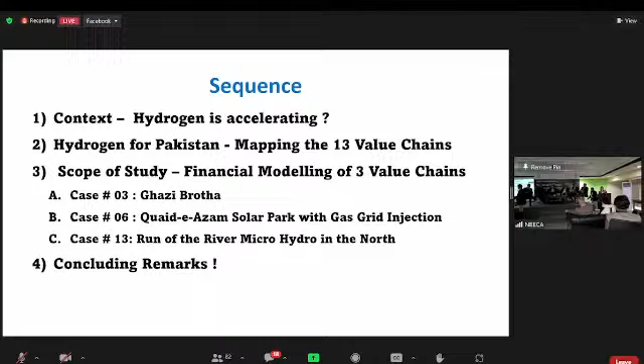And then at the end, I will present some concluding remarks, particularly some insights from this analysis which we carried out. So going forward, as most of you know, hydrogen will have a significant role to play as a clean energy vector in the future energy mix.

Some examples of applications that become competitive: the first one, commercial vehicles, trains, and long-range transport applications are going to compete with low carbon alternatives by 2030 due to lower equipment and refueling cost. If you look at the Energy Ministerial in Japan, they have agreed to have 10 million vehicles running on hydrogen by 2030. This is a very ambitious target, but the data now available shows they are quite in line with this progress.

Then hydrogen boilers will be a competitive low carbon building heating alternative, especially for existing buildings currently served by natural gas networks. The third application is industrial heating - hydrogen will be the only viable option to decarbonize in some cases, besides balancing the power system, as hydrogen production cost drops and demand is going to increase in the days to come.

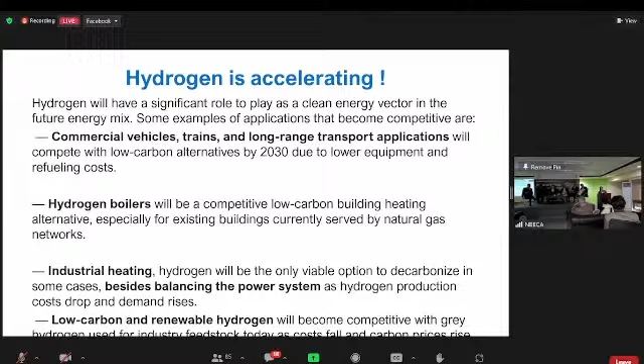These trends are highlighted in this slide, where you could see the drivers highlighted on the left hand side, showing a stronger push to limit carbon emissions - 10 years remaining in the global carbon budget to achieve the 1.5-degree goal. Right now, 66 countries have announced net zero emissions as a target by 2050 and are focusing on this. Out of this, 18 countries have a clear roadmap to follow green hydrogen as a major vector in their energy mix.

Then there's a very visible trend showing that costs are falling for renewables and hydrogen technologies. There's roughly an 80% decrease in global average renewable energy prices since 2010, and this is a big push. Also, there's roughly 55 times growth in electrolyzer capacity by 2025 versus 2015, making hydrogen a very viable technology in the days to come.

There are a few indicators also showing a growing momentum when it comes to the strategic push in national roadmaps. Roughly 70% share of the global GDP is linked to hydrogen country roadmaps data, from these 18 countries, which contribute to 70% of the global GDP, and they are very hawkish on hydrogen as an important vector of energy in their energy mix.

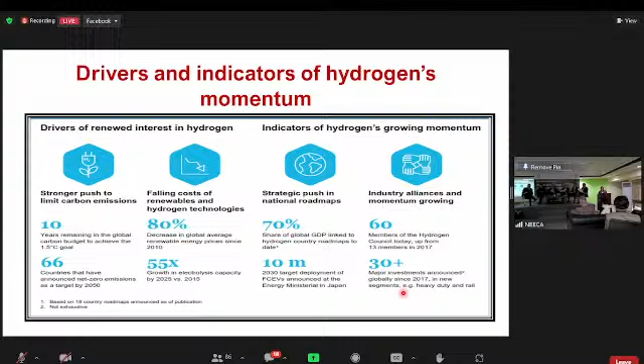So having this kind of trend and key indicators in mind, there's a possibility that scaling up the full value chain is key to unlocking potential applications. There's a 60% cost reduction of hydrogen by 2030 for end users. This is a very important finding of research recently carried out, which highlights a subsequent study. I'm going to show some of our results which are not very encouraging, but keeping this trend in view, those results become very encouraging.

So then hydrogen could meet a significant share of global energy needs competitively. Roughly the share of global energy demand where hydrogen applications can compete with other low carbon alternatives by 2030 is roughly 15% plus. That's a huge share in the energy mix if we look at the current scenario.

So then why hydrogen for Pakistan? Keeping in view that we analyzed the 11th, 12th five-year plan, Vision 2025, and most of our annual reports on energy, state of energy in Pakistan, these highlight the strategic energy priorities of the government of Pakistan: number one, national energy independence, then continuous energy supply security, and affordable energy. These first three include...

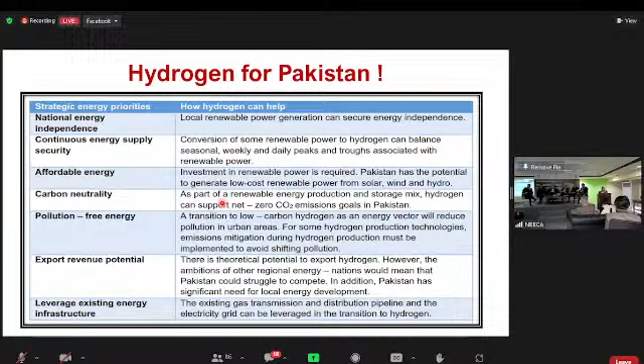And then the last one, leveraging existing energy infrastructure, which is very much there, which I'm going to show in the next slide, showing that blending hydrogen into the high pressure gas grid transmission must be evaluated very carefully, as there is a possibility to add a mix roughly from 2% to 8% in a very safe range, but it could even add up to 12% as per international research.

Dr. Stephen is along with us, who is an expert in this area and a kind of mentor for me as well when it comes to the technical side of this important vector of energy. He will also highlight this.

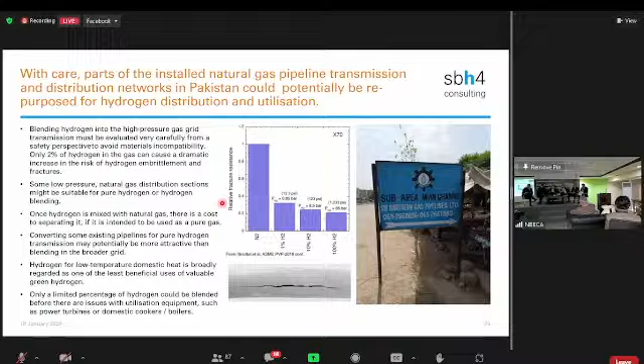So then there's a possibility of some low pressure natural gas distribution sections which could be augmented by adding hydrogen, by blending into the existing infrastructure of the gas pipelines in Pakistan. Once hydrogen is mixed with natural gas, there is no additional cost, or if there is a cost, then it's very minimal. But when it comes to separating it from the natural gas, then it takes a lot of effort and cost. Converting some existing pipelines for pure hydrogen transmission may potentially be more attractive than blending in the broader grid. Then hydrogen for low temperature domestic heat is broadly regarded as one of the least beneficial uses of valuable green hydrogen.

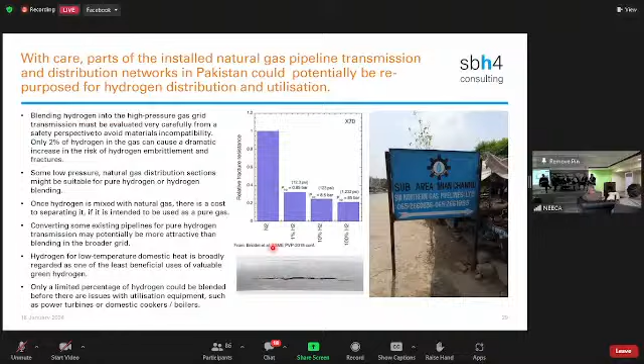As compared to burning it for fuel or cooking, it is a more important vector to be used for power turbines and boilers, as well as for transportation infrastructure and networks. So keeping in view these benefits and gains, there are a lot of potential gains to opt it as an important vector or driver in the energy mix.

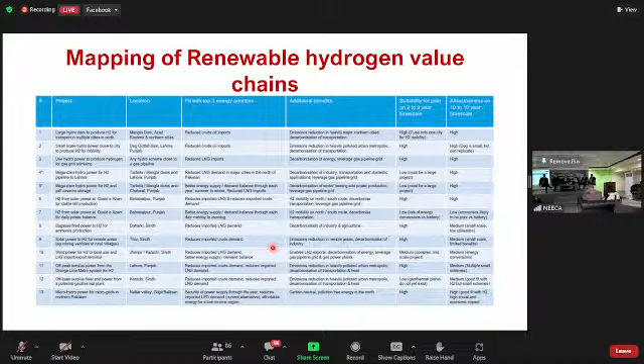Going forward, we mapped 13 value chains, but due to paucity of time, I'm not going to develop on that, since this presentation will be available to all participants after the event. These 13 value chains were clearly mapped where some business proposition was existing, and these 13 propositions were presented to NEECA, which proposed, keeping in view multiple aspects, along with the team of experts working on this study.

We then finalized three projects. The number one is project number 3 out of these 13, which is use of power to produce hydrogen for gas admixing between 2 to 6% at Ghazi Brotha run of the river hydro dam.

Then project number 6, which is a kind of Quaid-e-Azam solar park, over where hydrogen will be produced. There are different variants, which I'm going to show you in the next slides. And then this will be transmitted to some nearby station, where it could be admixed to the existing pipeline network.

And number 13 was a proposition where a micro hydropower for micro-grids is going to be established in the northern Naltar Valley of Gilgit-Baltistan. This micro run of the river grid is going to produce electricity.

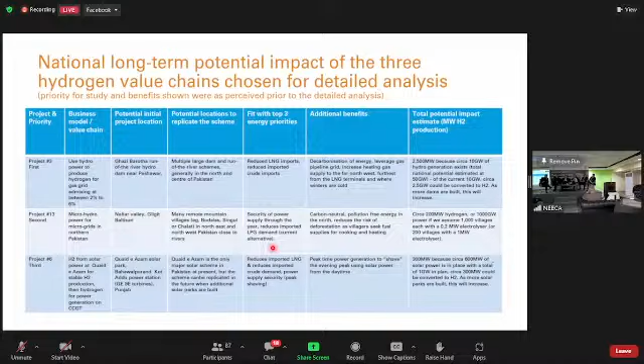Besides, for 9 months, it is going to produce hydrogen as well as a byproduct, which is then going to be used to run that grid or the turbine for more than 1,000 villages nearby the Naltar Valley, to provide electricity during the cold winter where the run of the river water is not available in the valley.

So these three propositions were then further evaluated by having the financial modeling. This is the methodology and key assumptions which we used for our financial model.

The first one, we use the discount rate of 7% per year, as it is the same benchmark being used in the Planning Commission for evaluating any long-range projects in Pakistan. Then, tax and duty on imported capital machinery at 25% was used, based on the HS code related to electrolyzers and all the equipment needed for these value chains to be established in Pakistan. We used a similar taxation or tariff structure in our modeling.

Then hydrogen energy value substitutes an equivalent amount of energy from LNG, LPG, or timber wood—because in northern areas it is not normal wood, it's a kind of good quality timber wood which is being used. So we use the pricing of that wood as a proxy to benchmark the benefits of having this much energy available in the northern part of Pakistan.

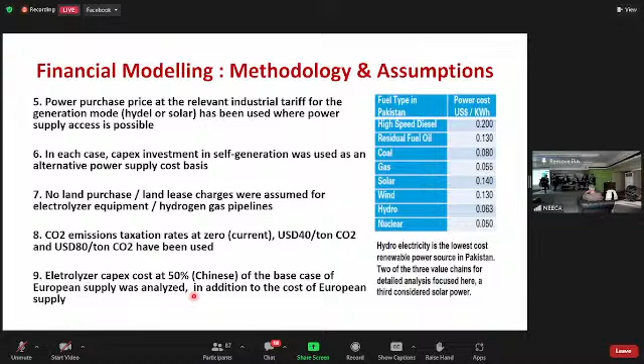So then electrolyzer capex cost at 50%, because some Chinese electrolyzers as compared to the European or Western electrolyzer manufacturers are available. So we ran few models by reducing the cost to 50%, so that if the Chinese electrolyzers are being used, what is going to be the implications on our net present value and economic rate of return.

Besides this, we carried out sensitivity mapping for each scenario using a 10% increase in cost, then another scenario for 20% increase in cost, and then a third scenario where we increase the cost by 10% and decrease the benefits by 10%, just to adjust for how this kind of possibility is going to impact the financial viability of these projects.

Our calculations also included additional factors that are region and application specific, such as the cost of storage, compression, transmission, and topography of the region where these value chains are going to be established.

These are needed if hydrogen is not self-consumed in few cases, though we have not accounted for taxes on the entity operating the plant, which could be province-specific taxes or also depend on the business model. For example, hydrogen could be produced for self-use or it could be used for sale in the market. So this is the kind of caveat to our analysis.

But these simplifications mean that the cost estimates are more generalized, because we think these are not too loose and can be very easily adapted for the necessary considerations if some more specific and advanced level analysis is required in this context.

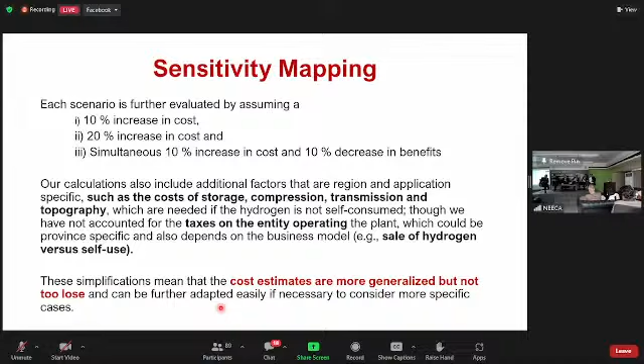So, after giving you this overview of how robust and rigorous this analysis was which we carried out, now I'm moving to the key findings of the analysis.

These are the life cycle pie charts, which show that the major cost is the electrolyzer when it comes to the 100 megawatt electrolyzer being installed on the existing Ghazi Barotha turbines. But the annual power cost is 29%, which is a huge cost.

So then in the subsequent model, we analyzed another possibility of 1 gigawatt, where we produce this electricity ourselves by adding an additional turbine on the existing Ghazi Barotha dam, and then analyzed what is going to be its implications. Moreover, we also analyzed a 1 gigawatt turbine as well as 1 gigawatt electrolyzer to be installed, and then looked at the possibilities.

So these you could see over here. Then all the four scenarios regarding the proxies which we use, the local natural gas, then LNG at the Qatar price, all those 5, 6 scenarios which I presented in the previous slide were analyzed.

Subsequently, the similar situation was analyzed on a 1 gigawatt power plant and electrolyzer. But unfortunately, you could see that there is a serious reduction in the levelized cost of hydrogen, that goes from $3.16 to $2.92. But when it comes to the levelized cost of energy, which is being used here, it's 4 cents, because we are having our own capex to produce electricity to run this electrolyzer on the Ghazi Barotha Dam. But unfortunately, there is no scenario which is feasible.

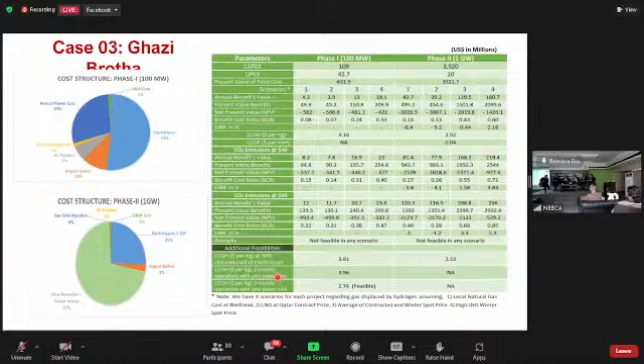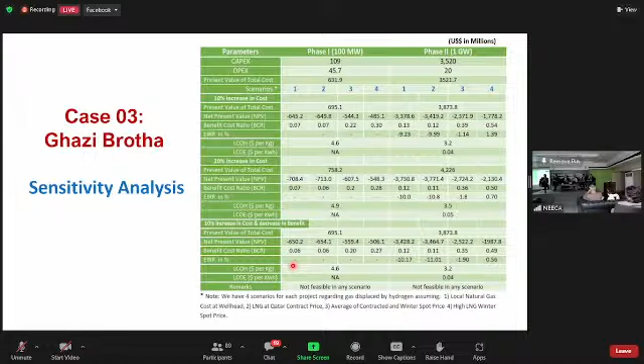So that was one possibility. We then ran the sensitivity analysis along similar lines, as I mentioned in the previous slides on methodology. Unfortunately, again, there is no possibility of feasibility under any scenario we ran on this model. So let's move to the next case.

That is the Quaid-e-Azam Solar Park with gas grid injection. Here we had three major possibilities. The first was a 100 megawatt option at the existing solar park, where we have to purchase electricity from the solar park, and its annual power cost comes to 25% of the life cycle cost of the total project.

The life cycle of the project is 30 years across all value chains, per the criteria used by the Planning Commission of Pakistan. We then ran another possibility where power would be uplifted by adding a CQ Solar system of an additional 100 megawatt and placing a 100 megawatt electrolyzer on it. A third possibility was a 1 gigawatt uplift of the solar park, along with placing a 1 gigawatt electrolyzer.

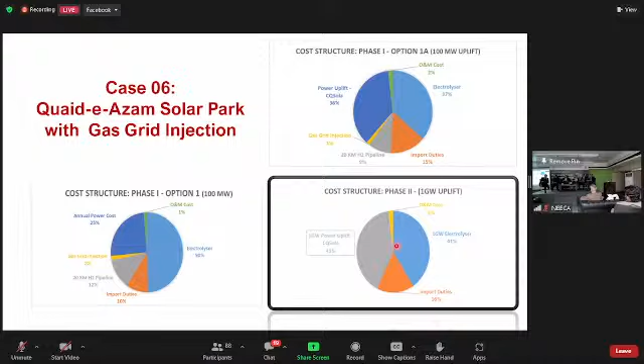In that scenario, in the second case, the capex increases but the annual energy cost goes down. When we want to achieve economies of scale with a 1 gigawatt uplift, the capex further increases, and there's a massive decrease in the unit cost of electricity. The levelized cost of energy goes down, but the levelized cost of hydrogen is still not good enough to make the project feasible.

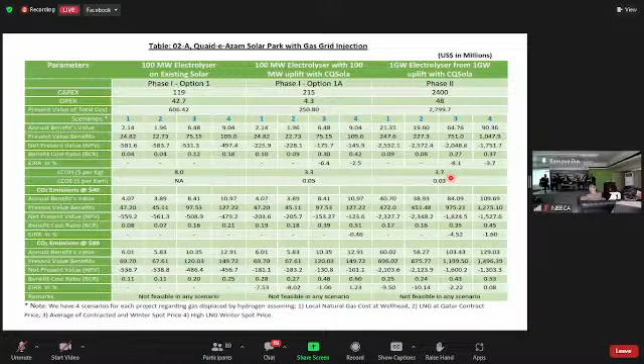These are the key findings. In option one, the levelized cost of hydrogen is $8 per kilogram. It goes down to $3.3 per kilogram when we have capex to generate our own electricity by uplifting the energy system, and it goes to $3.7 per kilogram when we increase the size from 100 megawatt to 1 gigawatt. But the levelized cost of energy goes down from $0.05 to $0.03 per kilowatt hour.

So there seems to be economies of scale when you expand the size of the solar park, but there are no economies of scale when we move from a 100 megawatt electrolyzer to a 1 gigawatt electrolyzer. There is a certain reason for this, which I will explain in the conclusion slides.

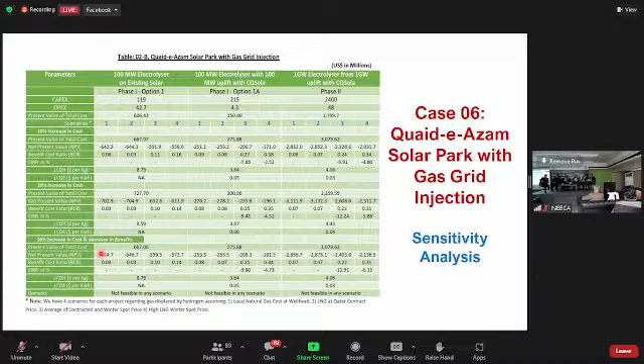Subsequently, even at $40 and $80 carbon emission tax, it's not going to make this value chain feasible from any angle. We then carried out sensitivity analysis along similar lines, but unfortunately again there was no impact on the feasibility of any of these value chains analyzed in this mega project.

Now let's move to the 13th case: run of the river micro hydro in the north. As I mentioned, the objective was to produce electricity on the run of the river, besides producing hydrogen as a byproduct, to be used for the three months in winter when water is not available and there won't be any electricity availability. It could be a microgrid solution for 1,000 small villages, with 200 to 300 housing units per village.

So here you could see that we ran three scenarios where the local natural gas and imported LPG prices were compared.

Since no pipeline gas could be provided over there, we haven't used that as a proxy to benchmark the benefits. Eventually, we used an average of LPG and local gas prices as another scenario. But in all these three scenarios, there is no possibility that it could be feasible.

So then we thought that deforestation is a major problem in that area, which could be curtailed if we provide the same hydrogen as a cooking fuel in small cylinders or through a small pipeline network in that area. These housing units could use hydrogen as a cooking fuel, saving the good quality timber that is being used over there.

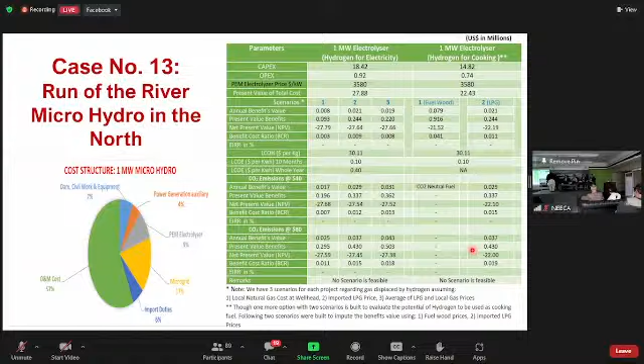But yet, this scenario is not very feasible. Eventually, if the wider economic benefits, like stopping the deforestation in that area, are incorporated, then this becomes slightly closer to feasible. Its cost benefit ratio becomes 1 to 0.98 - very close in range.

So then we ran the sensitivity analysis on this value chain as well, but unfortunately no scenario could become feasible along the sensitivity analysis.

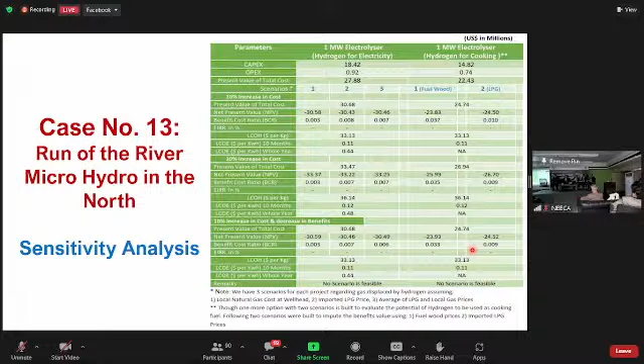Using this to produce the power - it could be hydropower or solar power - is always more attractive because the levelized cost of energy is very cheap in that option. But when using investment in self-generation, the levelized cost of energy and levelized cost of hydrogen are in the range of international benchmarks for similar schemes, though they are not feasible in the Pakistani context.

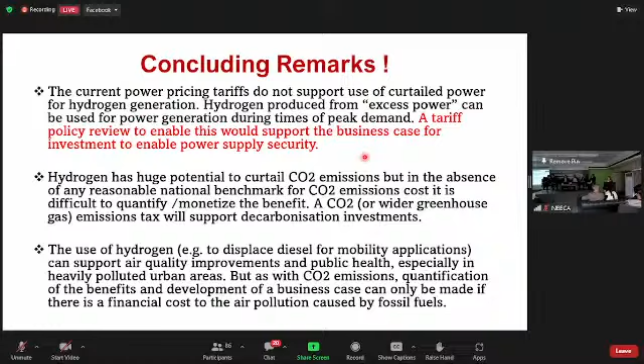Development of a regulatory framework for underground hydrogen storage in new salt caverns would make the case of the highest LNG cost analyzed very realistic. And lastly, alternative hydrogen production technologies and utilization cases may also become bankable projects.

Only 3 out of 13 proposed value chains were analyzed in detail through this study, because that was the scope of work we took as consultants. This study has therefore not been exhaustive in conducting a detailed analysis of the breadth of options for hydrogen deployment in Pakistan. So a future strategy that treats the value chains we mapped as infeasible would not be a wise approach. Rather, there could be a lot more potential, keeping in view the time lag since some of the key developments happened.

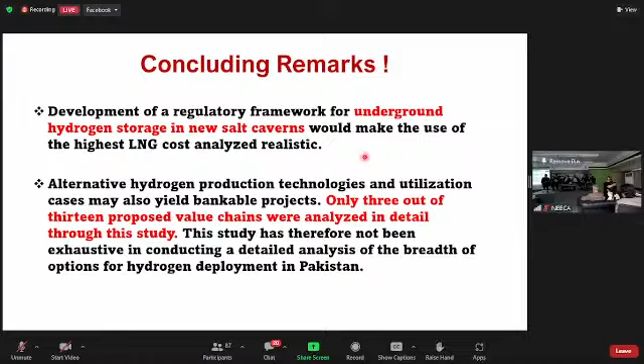Mr. Stephen, who is the guru of hydrogen, and from whom I also learned a lot while being team lead on this assignment along with Nika, will highlight this further in the subsequent presentation. With these key highlights and insights, I would like to thank you for your attentive listening. And over to NEECA, please.

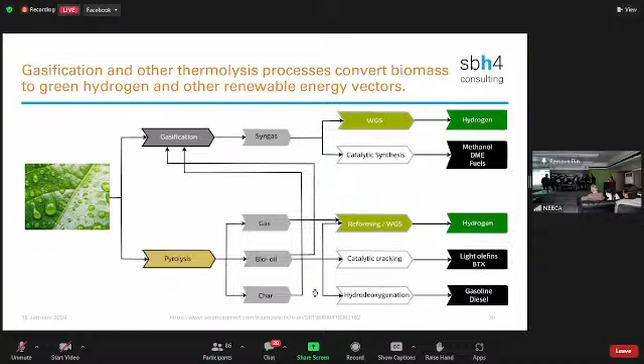Thank you very much. Can you hear me, please? And can you also confirm that you can see my screen? Yes, Stephen, we can hear you, please. And can somebody confirm that you can also see the screen that I'm sharing? Has that worked? Yes, we can see the screen. Thank you very much indeed. I'm just trying to adjust things so that I can actually see myself as I present here. Otherwise, it's a bit difficult for me.

Firstly, thank you very much indeed to Dr. Nadeem for his presentation today and also his friendship over the last 4 years. And thank you also to the esteemed colleagues at NEECA for the invitation to speak today. A lot of things have changed in the world of hydrogen since we did the study.

As Dr. Nadeem said, the 3 cases we looked into in detail were simply 3 of 13. If I were to have my time again, with the experience that I now have and the world has 3 years later, I think perhaps we might have picked different studies that could have ended up being significantly more economically attractive.

Things have changed significantly, and it really is worth having another look, I think, is my main and key message to you, which I think is the message Dr. Nadeem was trying to explain in his last slide.

So let's see what's been changing in the world today. Here are what I regard as 10 key shifts that have taken place, some of which we accounted for in our modeling. For example, the expected cost reduction of Chinese electrolyzers, we modeled for that. But other things have also changed.

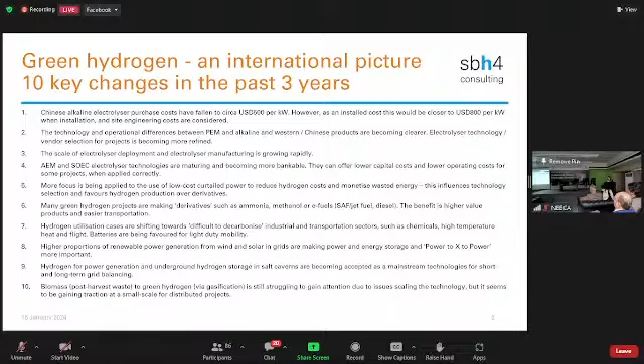So when Dr. Nadeem was speaking a moment ago about providing heat for cooking and heating in very remote regions, we were looking at doing that through hydrogen and making hydrogen locally. If I were to have my time again, I think what I'd be saying is let's make renewable LPG, effectively let's make DME, dimethyl ether, and transport that into those regions and provide them with enough inventory to cover the winter. So I think what the world now knows and what I now know would really cast different light on the work that we did, and or would do if we were to come back into this area.

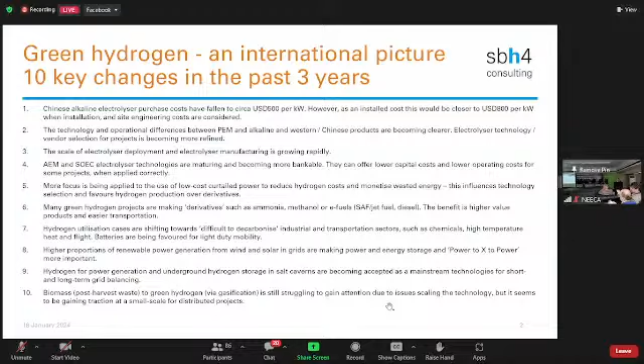Let's cast our minds back 100 years to the first big hydrogen project that ever took place, and this was in Norway, at more than 100 megawatts. So this is comparable to some of those big hydro projects that Dr. Nadeem was explaining to you. The reason for making hydrogen was not to make hydrogen. The reason for making hydrogen was to make ammonium nitrate fertilizer.

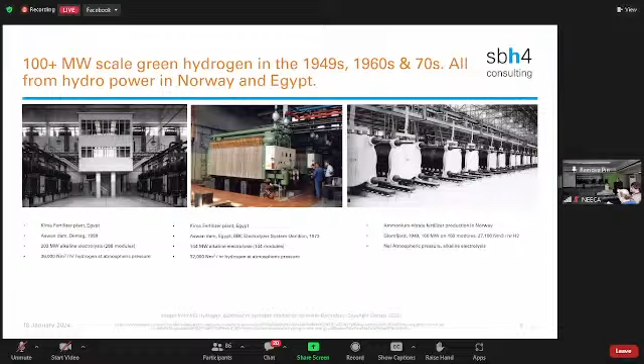On the left here, Kwekwe in Zimbabwe, that was also ammonium nitrate for use in the mining sector and also as a fertilizer. Here, two cases in Quebec in Canada, all of these running off hydropower.

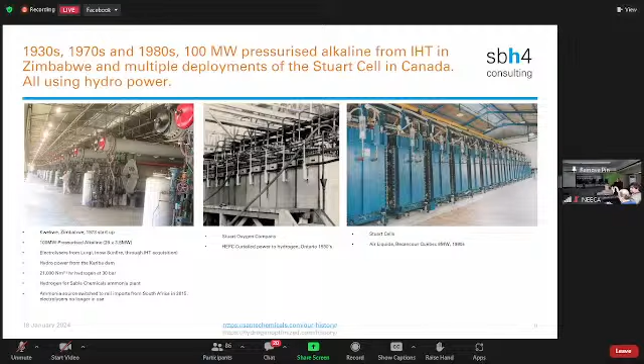All of those projects, which were about as big as anything we're doing today, have now closed down. Why? Because making ammonia or ammonium nitrate or urea fertilizers from LNG, from liquefied natural gas or pipeline natural gas, was cheaper.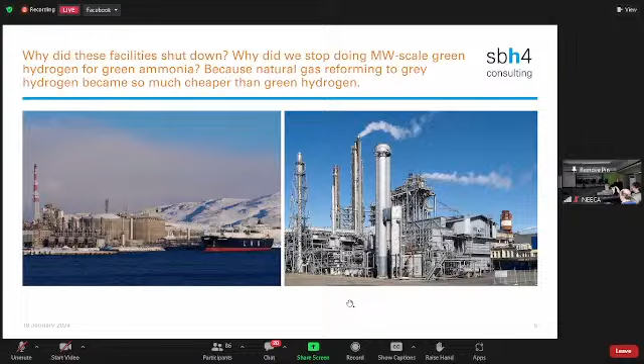On the other hand, we're now seeing, in some cases, rising LNG, imported LNG prices, and a drive to decarbonize and defossilize. So there's a huge motivation to look again at those big hydrogen projects, just like we were running 50 years ago. And as you can see, the electrolyzer on the left there was exactly the type that was installed in Kwekwe. And even the electrolyzer technology has been rejuvenated by a German company called Sunfire. So we're seeing the whole clock turn back between 50 and 100 years, and we're reinventing what we have learned and done in the past.

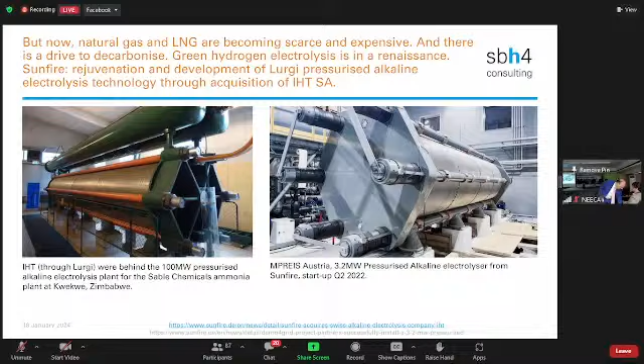That's exactly what is being done in this project in China. Ammonia, again, is the target molecule, but of course we need to start with green electrons, then make green hydrogen, then make the green ammonia.

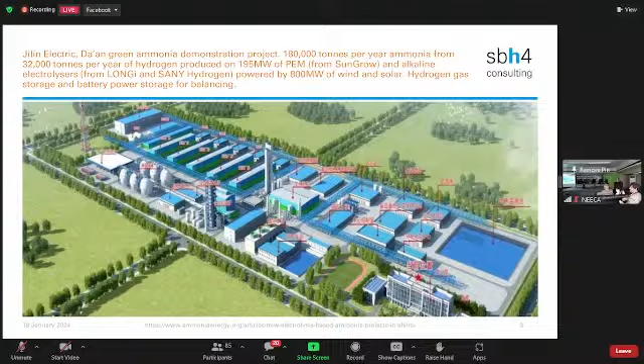And it's interesting that this particular project uses a combination of electrolysis technologies, from alkaline that we evaluated heavily a few years ago, and includes an element of PEM, which is a different electrolyzer technology that typically costs a bit more to deploy, but has the benefit of being able to work with intermittent power. So it switches on and off more easily.

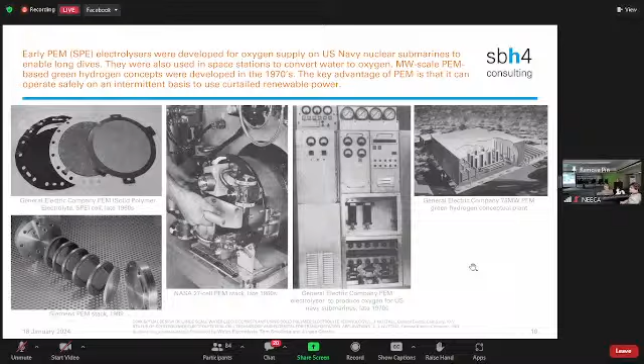So the beginnings of PEM electrolysis, you can see here, were through the General Electric Company in the United States and Siemens in Germany, around about 50 years ago. And this is a modern PEM facility on the left, 10 megawatts in Germany, on the right, 20 megawatts in Canada, from ITM Power and Cummins.

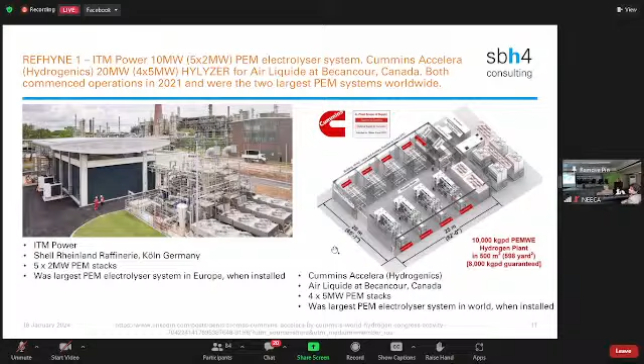And here's a large Siemens PEM electrolyzer on the left, just been delivered and waiting to be installed at an e-methanol facility in Denmark being operated by European Energy.

Again, I keep coming back to this point that a lot of hydrogen is being converted to other chemicals, typically called hydrogen derivatives, such as methanol and ammonia, because they are higher value and easier to transport than hydrogen.

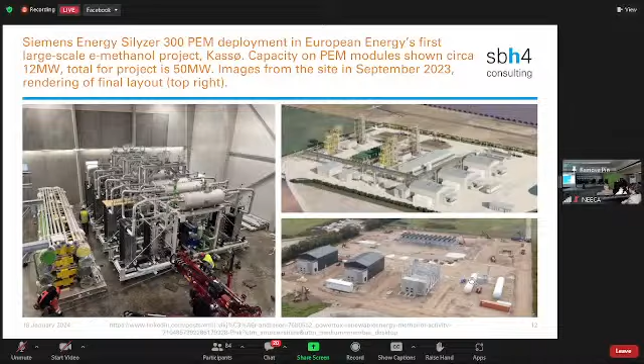Taking a step back, if we want to make hydrogen or even those hydrogen derivatives, we must recognize that the vast majority, if we look at raw capex of a fresh greenfield site project, is going to go into making those green electrons. You saw that very clearly from one of the pie charts that Dr. Najim put up when we considered self-investment in a new turbine at the Ghazi Barotha Dam. Suddenly that was three-quarters of the project capex and the electrolyzers were looking cheap.

Whether it's wind, solar, or hydro, the same holds true. What it really means is that we need to focus on green hydrogen projects in parts of the world, or in parts of Pakistan, where green electrons are cheap, where we've got good solar, where we've got good wind, or on the other hand, where we have curtailed power. Dr. Nadeem made a few examples of the use of curtailed power when there's more power being produced than we can actually put onto the grid or recover. Free power.

All renewables are variable. Everybody knows about the variability of solar. What people don't quite know so much about is the variability of hydro - it's variable on a seasonal basis. And of course, wind just does whatever it wants to whenever it wants on a daily, weekly, and annual basis. But we can integrate and combine those various different variable renewable sources to give a relatively firm power profile.

This can improve electrolyzer utilization and economics, and Dr. Najim was trying to explain this through some of his work. The electrolyzer utilization can improve the electrolyzer economics, and a lot of historical projects have tried to increase electrolyzer utilization. Certainly if we're going through to derivatives such as ammonia and methanol, that can be helpful because the total project capex is higher.

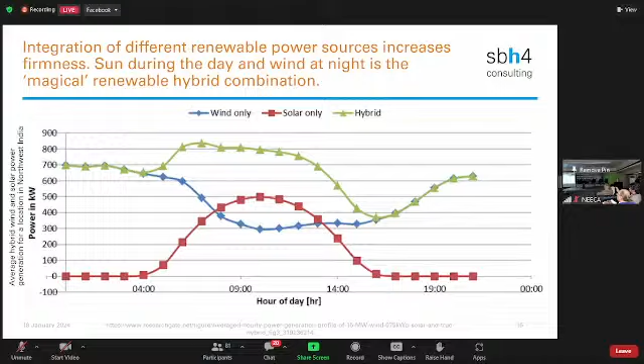Now what that means is that instead of you paying money to run your electrolyzer and purchase green electrons and make hydrogen, somebody else is paying you money to take those electrons off the grid. Somebody is paying you money to make hydrogen. It completely transforms the economics. Again, when we start thinking about these business models, we need to understand what is the power pricing strategy and tariff in a particular country. But whether or not the pricing tariff works in this way, the grid will be working in this way.

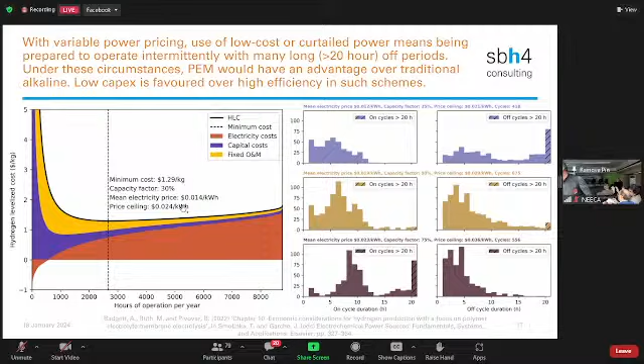This whole business of using curtailed power is a massive shift in the way people are thinking about green hydrogen projects. What that means, though, is that we must be using an electrolyzer technology that is able to cope with intermittent operation, on-off operation. That favors PEM or a new technology called AEM, which tends to be more expensive than alkaline. However, if we think smart, we can combine the cheaper alkaline electrolysis with the more expensive but more flexible PEM or AEM electrolysis to generate an electrolyzer park that is well suited to variable or even intermittent renewable power operation.

When we modeled, we used McPhy as a Western electrolyzer provider, and a lot of the Chinese producers are also catching up with Western technology. Everybody's showing us a vision of large electrolyzer parks and how they would look in the future based on modular configurations.

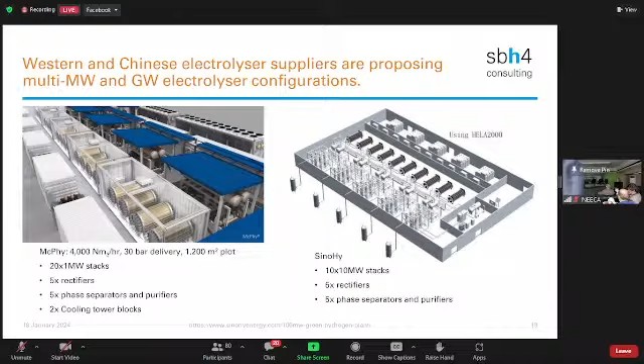Pressurized alkaline is becoming a very standard technology, especially for the younger, newer Chinese electrolyzer producers who are offering the lowest cost alkaline equipment. We can see here that the price for LONGi equipment is perhaps as low as $350 per kilowatt, but bear in mind that's the purchase price of the equipment. Once it's been installed on site, you can perhaps say it's going to be 500, 600, maybe even $700 per kilowatt once you include the engineering costs, tie-ins, and site costs.

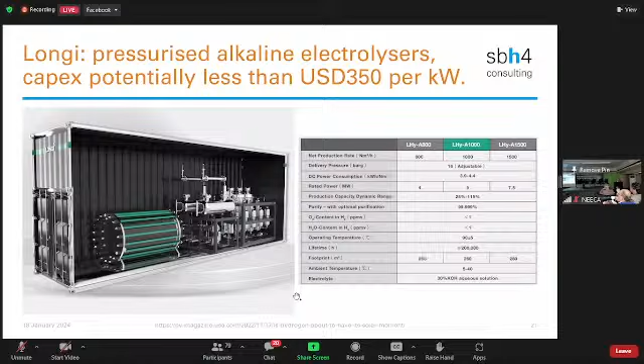I'd say just a little bit of a warning here, please, to everybody, and the world has learned a lot over the last 3 years. Some of the technology and materials that the Chinese electrolyzer producers are using are different to what a Western electrolyzer producer would be using. In fact, some of the Chinese electrolyzer producers shift the materials and the specification when they market their electrolyzers inside of China versus outside of China. There are real differences between the cheaper and more expensive technologies, and sometimes it's worth paying a little bit more to get something better. It really depends on the use case.

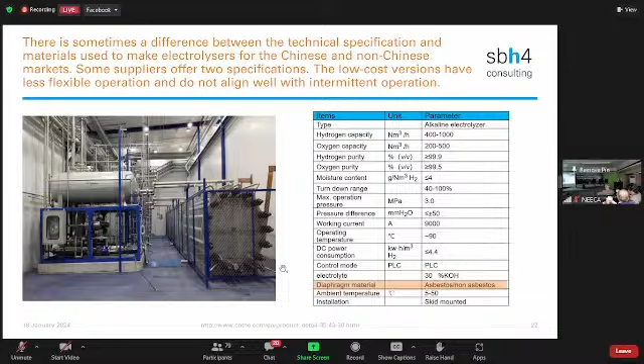We learned that quite painfully, or Sinopec learned that quite painfully, at this 260 megawatt electrolyzer park, the world's biggest electrolyzer park, which started up late last year. A promise from the Chinese electrolyzer suppliers was that it would be able to turn down to 30% of capacity. The reality was that it can only turn down to 50% of capacity, and use of a particularly low-cost diaphragm material inside of the electrolyzer is the main reason for that difference. So we're learning as we go the strengths and weaknesses of various different systems, what to do, when to do it, what not to do, when not to do it.

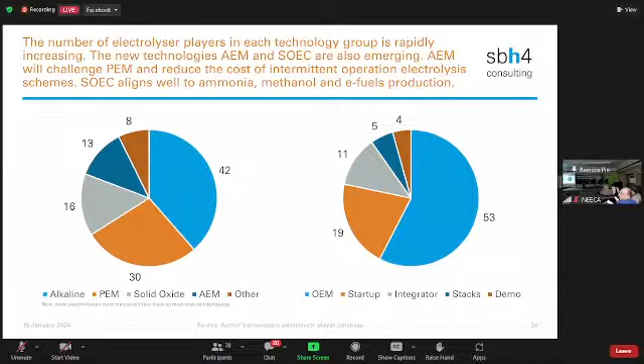The number of electrolyzer producers, whether Chinese or Western, is growing very fast, and the number of deployable, bankable technologies we can consider is also growing quite fast. So alkaline and PEM are being joined by solid oxide and AEM. The choice and diversity of technology and its cost point is shifting very quickly. Again, if we were to remodel some of these cases in Pakistan, we may choose different technologies and begin to get some different numbers coming through.

I'm switching now a little bit, coming through more to hydrogen utilization, away from production through to utilization. This is a project proposed for the Netherlands. The reason I'm showing you this one is it combines something which I think is incredibly important for the future, and that's large-scale hydrogen storage in underground salt caverns. Now, not every part of the world is able to do this because you need to have the right type of rock and geology underneath the ground. You need large salt deposits, which do exist in the Netherlands. And if you can do it, maybe you should do it.

I believe the indications are there's a similar rock strata between Islamabad and Lahore in Pakistan that could also potentially be used. But bearing in mind that we're going to get more and more variability of power production, more seasonality of rainfall, all of these kinds of things, power and energy storage to do short-term and long-term seasonal balancing is becoming more and more important. In this particular application, the hydrogen is going to be released onto a power generation turbine.

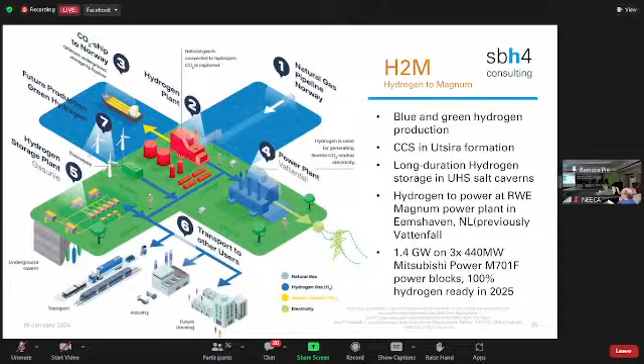Exactly the same scenario in the United States. This is the ACES project in Utah: electrolytic hydrogen, underground hydrogen storage, and that hydrogen being released onto a Mitsubishi Power specially adapted turbine to produce power to shave off the peaks in power demand, just like the gas turbines in Pakistan are used as peakers. This would be a hydrogen peaker instead of a gas peaker.

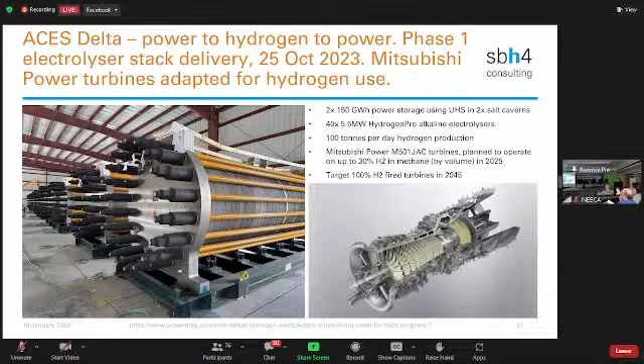As I said earlier, you never really know until you start doing exploratory drilling, but the indications are that in several areas of the Potwar Plateau, underground hydrogen storage would be possible from a technical perspective. If it can be done, it is by far the lowest cost way of storing hydrogen in large quantities over a seasonal basis, to smooth out that massive peak in hydroelectricity production, as an example, or to smooth out wind and solar production peaks, or to smooth out the demand profile through winter and summer.

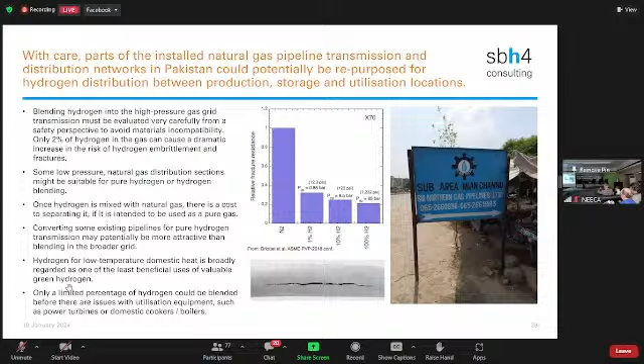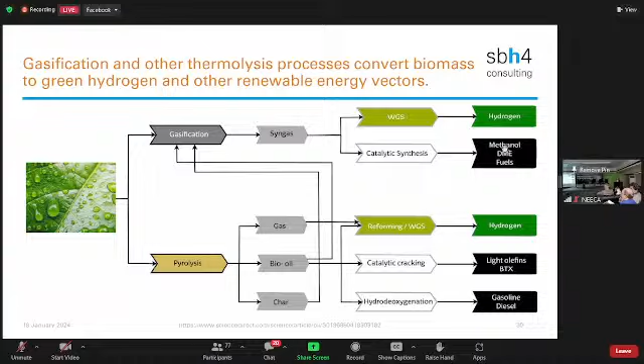The other pathway to green hydrogen, and I'm really pleased that Dr. Nadeem mentioned that other technological pathways can also be considered beyond electrolysis, is through biomass, which is a carbon neutral feedstock. We go through a gasification pathway to end up with hydrogen, and we can also end up with a lot of other very useful fuels. Again, the example of methanol and DME is covered here. DME, dimethyl ether, is effectively an LPG, a bottled gas substitute.

The issue with using biomass as a feedstock, again, is seasonality. Hydropower is seasonal, so is harvest. Some harvests take place throughout the year - in Pakistan, agriculture used to operate on a 9 months a year basis, which is clearly one option. Alternatively, we begin to blend solid waste - trash, garbage - with some of the biomass and make hydrogen that way, thereby mitigating the issue of seasonality. Clearly, the CO2 intensity changes when we do that.

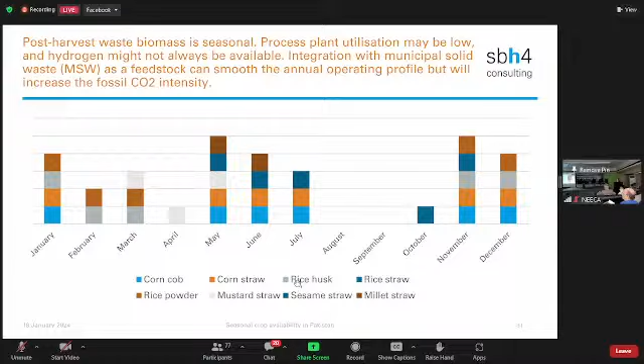So the last slide, which I've just thrown in at the last minute when I heard Dr. Nadeem talking about fuel in remote regions - again, just a quick reminder, please. Bottled gas, LPG, can be made in a sustainable way, either through electrolytic hydrogen or biomass to hydrogen, biomass to syngas, through methanol, and then to DME, dimethyl ether. DME is effectively the best possible renewable substitute to LPG, which for Pakistan represents an imported fossil fuel energy vector, a bit like LNG. If people are using renewable dimethyl ether to do their cooking, they're either displacing imported LPG or displacing imported LNG potentially. So good in either direction, and also good for the climate.

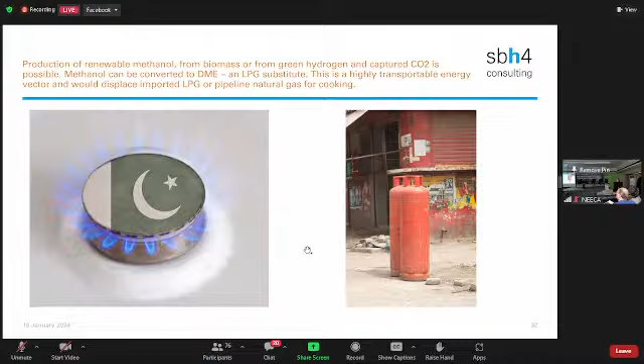So yes, just to summarize, similar to how Dr. Nadeem closed also - we did certain things. Did we do everything exactly right? Did we look at all the right cases? Maybe, maybe not. We did our best 3 years ago. How would we do things right now with the benefit of an additional 3 years of knowledge and how the world has changed? I think it definitely warrants taking another look at the deployment of green hydrogen from various different routes and pathways in Pakistan to support decarbonisation and to support the local economy. Thank you.

Can we ask the question? Nika, are you chairing the session? I don't really know what the agenda is. I'm very happy to take questions, but please can Nika give some guidance on whether we do that now or later?

Absolutely, I'm cautiously optimistic, but until we are cautiously optimistic, we will not move forward towards a solution. Hydrogen is the lightest element, very reactive, highly combustible. It has been used in the chemical industry for decades, primarily in fertilizer and petroleum refining. In 2021, demand was 94 million metric tons. It is expected to double by 2030, and particularly the demand will come from heavy industry, power generation, and the production of hydrogen-based fuel.

This is pretty much a very clear-cut thing. In sources of hydrogen, more than 99% of hydrogen today is produced from fossil fuels, particularly natural gas and coal. With the global focus on energy transition - but for us, energy affordability is more important than transition. It's extremely important, so my talk, a small talk for 5-10 minutes, will be through that lens of affordability.

There's a lot of emphasis on hydrogen via cleaner or greener sources, as they say. The clean forms of hydrogen today are blue, produced from fossil fuels but with carbon capture, and green, produced from electrolysis with water as a source using renewable energy. This shift in production method can significantly impact the carbon footprint of the energy industry, since hydrogen produced from coal and natural gas - and this is important - emit around 20 kg and 9 kg of CO2 per kilogram of H2, while green hydrogen emits none.

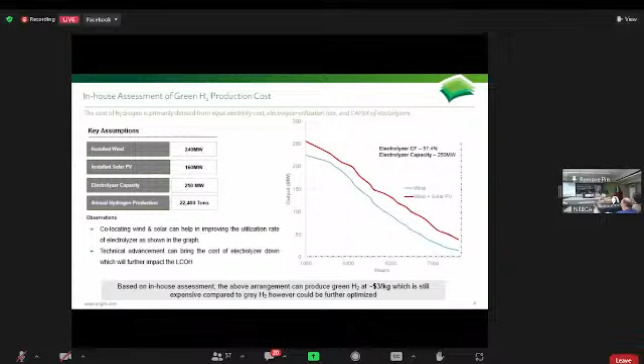Electricity constitutes approximately 70 to 80% of the cost of green hydrogen. Reducing the cost of input of electricity can bring down the cost of green hydrogen.

One solution, which I'm sure you're all aware of, especially in the policy circle, is CTBCM. It's stuck because we cannot figure out or decide on the wheeling charges. In India, Thailand, Vietnam, most of Southeast Asia, where the electricity market has been partially liberalized, the wheeling cost for new green energy projects is zero. In Pakistan, the demand is 28 rupees today by DISCOs. It's impossible.

So without giving subsidy, some sensible policy decisions can bring the cost down, and we have done the work. If you see on the slide, this is internal work done by my team in '23, very detailed work, and you can bring down the cost to approximately $3 per kilogram of hydrogen.

Number two is the electrolyzer cost. Electrolyzers are the main equipment—the cheaper the electrolyzers, the cheaper the hydrogen it can produce. It's simple maths. Chinese alkaline electrolyzers, and I think Stephen touched on it, are far cheaper compared to the Western alkaline and PEM electrolysis systems. With the rapid advancement of technology, just like batteries, just like solar, just like wind, it is expected to come down significantly.

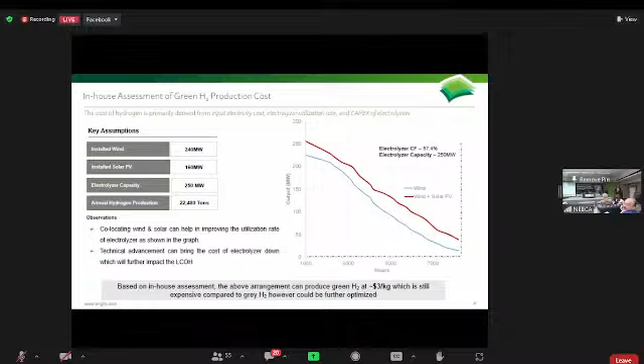Number three, the third and last factor in the cost is the capacity factor utilization of the electrolyzer. What does it mean? It's the percentage measure of electrolyzers being used. Because the significant source is renewable energy—wind and solar, and sometimes hydro, as you saw—this is intermittent by nature, meaning there are times when electricity is not produced for electrolyzers. In that case, a combination of battery or all three sources carefully can help improve utilization close to 100%.

Now we know these things, we know how it works. In Pakistan, we did a pre-feasibility study of a potential place in Jhimpir in Sindh. I would urge that this is a great area—Keenjhar Lake is right there, so you have the source of water. You have the wind corridor, one of the best in the world. It's 100 kilometers from the port in Karachi, not very far. We think it can be done.

What really surprised me when I came to Pakistan after 20 years and looked at the projects was that we put up wind power plants, but the land between the turbines is empty. So our per kilowatt per acre utilization is extremely poor. We looked at the project and said, why don't we do a hybrid? Put wind, fill it up with solar, then fill it up with batteries, and see how the numbers work. Given the battery cost going down, it is getting close to $3 per kg.

The second issue I told you—first was cost, second was storage. Storing 1 kilogram of hydrogen in normal conditions requires 8 times more space than storing 1 kg of natural gas. This is a fact, and this is a challenge. Therefore, hydrogen is condensed through pressurizing, liquefaction, and chemical compounding to make it viable.

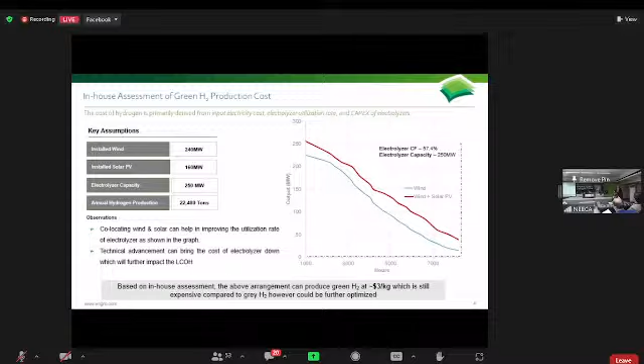Greenco in India currently exports ammonia to Europe. Companies in Europe get tax credits from the European government, which they in turn pass on to the manufacturers of green ammonia. Now, Greenco doesn't get any subsidy from the government—what they get is zero wheeling charges from the discos, whether state discos or central government discos. Not in our case.

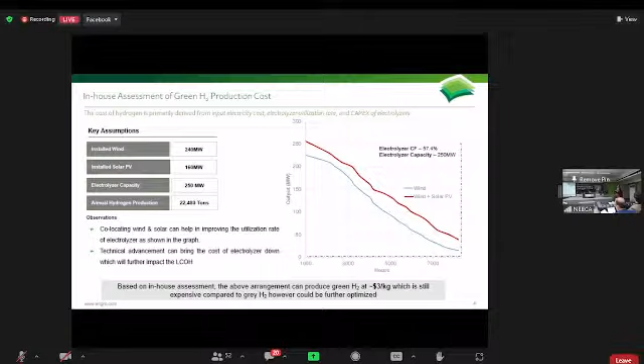Transportation of hydrogen from the generation side to the demand side is currently costly. Trucks and ships are expensive due to the lower volumetric density. However, pipelines offer the cheapest mode of transportation for hydrogen because hydrogen travels faster than natural gas, compensating for its low volumetric density. So there are advantages to hydrogen.

Pakistan is blessed with a network of pipelines running across the country, because from the 1950s we have been doing that. We have looked at the hydrogen data and worked some technical cases. Hydrogen can also be blended into existing gas networks up to 5 to 20% without any major infrastructural upgrade. A number of demonstration projects have been done around the world to examine the potential. Having one of the largest gas pipeline networks in the world, it's a no-brainer. If near a pipeline SSGC or SNGPL has ullage, why don't we use that?

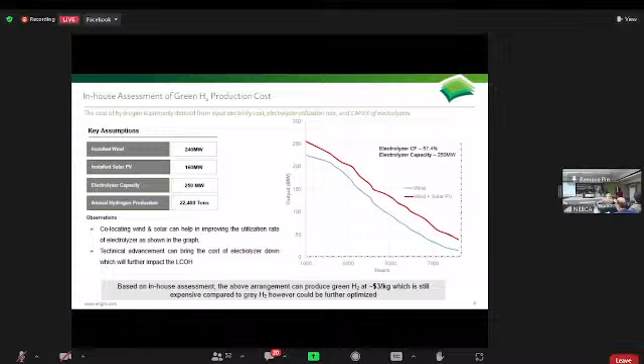My final point is that Pakistan should also explore the opportunity of exporting green hydrogen, which I already talked about. So concluding, there are 6 or 7 questions that are still challenging today, and I would leave you with those questions for the esteemed experts on this call to ponder on, and maybe we continue this dialogue.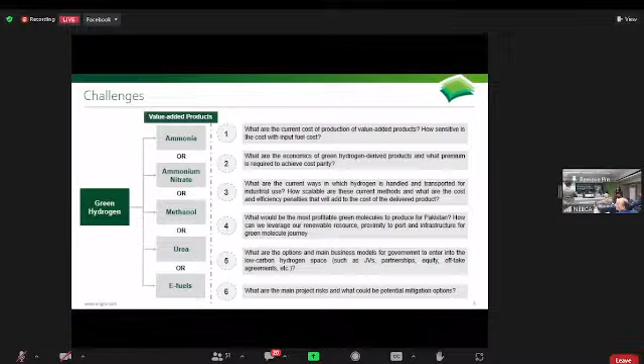Now the key challenge we have is what is the current cost of production of these value-added products. We partnered with Mitsui, the largest ammonia trading company in the world, Japanese. They bring the cheapest debt in the world. So debt is available if the companies they are working with are credible, because for hydrogen, the execution of the projects is also important. So the demand is there, it's just whether we can get the right partners in. We may not get G2G subsidies, but companies are ready to partner.

And these questions we also pose to Mitsui as well: what are the economics of green hydrogen derived products, and at what premium is required to achieve cost parity? This is the question we are still struggling to answer. Number 3, what are the current ways in which hydrogen is handled and transported for industrial use? Number 4, what would be the most profitable green molecules to produce in Pakistan? How can we leverage our renewable resource, proximity to port, and infrastructure for the green molecule journey?

Number 5, what are the options and main business models for government to enter into the low carbon hydrogen space - JVs, partnerships, equity, offtake agreements, etc. And finally, what are the main project risks which could be potential, and what would be the potential mitigation options?

So we as the private sector are actively working on it. At the end of the day, my request would be: technical challenges we will continue to de-risk. But if a space is created within the government where, without giving subsidy, policy work is done in such a way that the inefficient subsidies are reduced, that automatically creates space for the private sector to come in and take the risk. The whole game is risk reward.